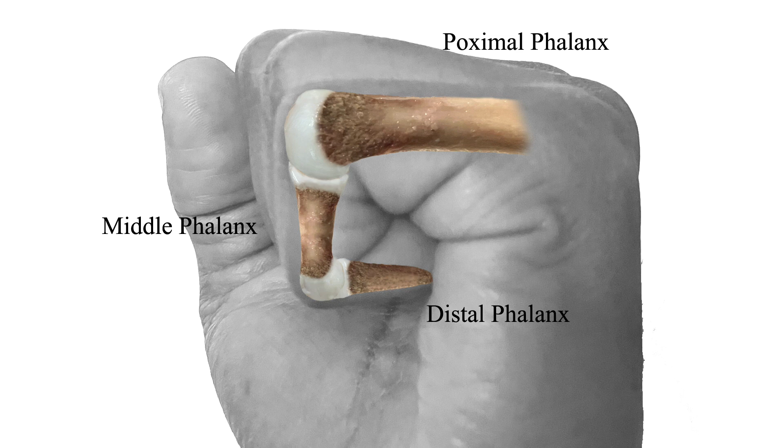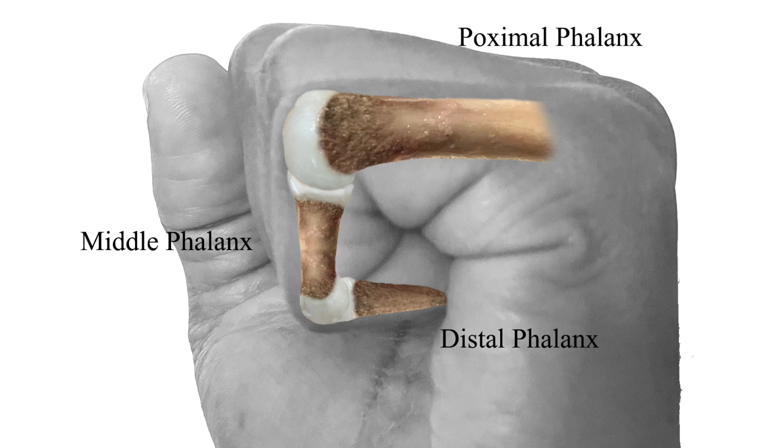The little finger has three bones: a distal, a middle, and a proximal. These bones are attached to each other by joints made of cartilage and ligaments. The bones move when muscles pull on them through several cord-like tendons, which means the prosthetic finger will need something to act as the bone, something to act as the joint, and something to act as the tendons.

Bone is a heavy material with a matrix of mostly calcium salts, phosphorus salts, and collagen. In material science, this is called a composite material. So an ideal bone substitute would be a similar composite like fiberglass or carbon fiber. But with trash, the best option is to layer plastic and metal sheets together.

It turns out that plastic trash also makes a good joint material, so it will be used for both. Fishing line will be used for the tendons, and it is not a common trash, but it is cheap, so close enough.

The measurements will use the metric scale because large fractions are a pain to deal with. For my model, I will be using my little finger in the fist position.

While approximating the centers of the joints, I can measure a 40mm line from the proximal phalanx. Similarly, I can measure about 20mm from the middle and distal phalanx. I can estimate the joint of the distal and middle phalanx to be a 10mm diameter circle, the middle and proximal joint to be a 15mm circle, and the knuckle to be a 20mm circle.

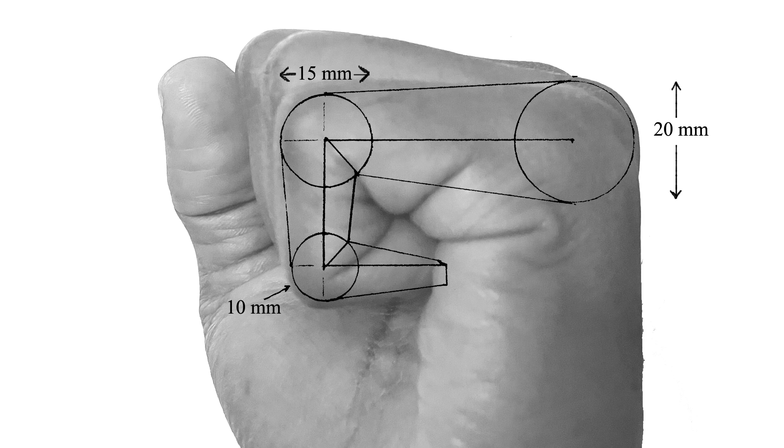I could draw lines from each joint circle to approximate the finger height. As I mentioned earlier, the joints and tendons will be plastic, allowing them to slide over each other, while the layering of metal and plastic will simulate the rigidity of bone.

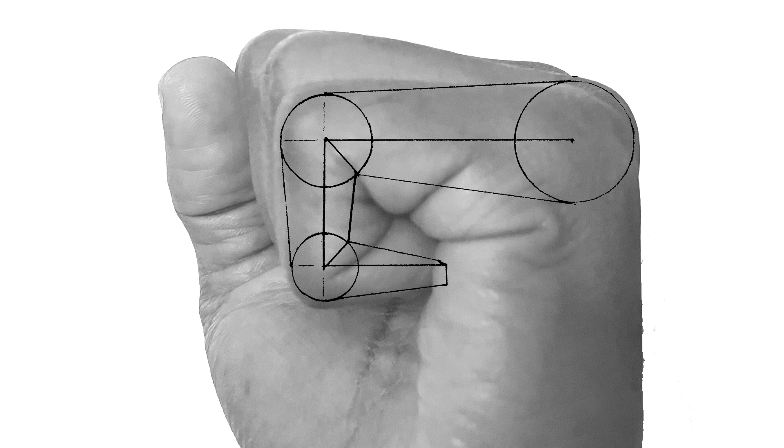Running fishing line around the metal edges will cut the lines, so plastic must also be used to protect the fishing line from the metal edges. Moreover, the tendons have to attach to bone, which means the fishing line will have to come in contact with metal at some point. This can be achieved by tying a fishing line to the distal phalanx.

That line can be run along the inside of the middle phalanx, around the middle and proximal joint, and finally outside of the proximal phalanx. Similarly, a second fishing line can be tied to the knot of the first fishing line, run on the opposite side of the middle phalanx, run around the middle and proximal joint, and then run outside of the proximal phalanx.

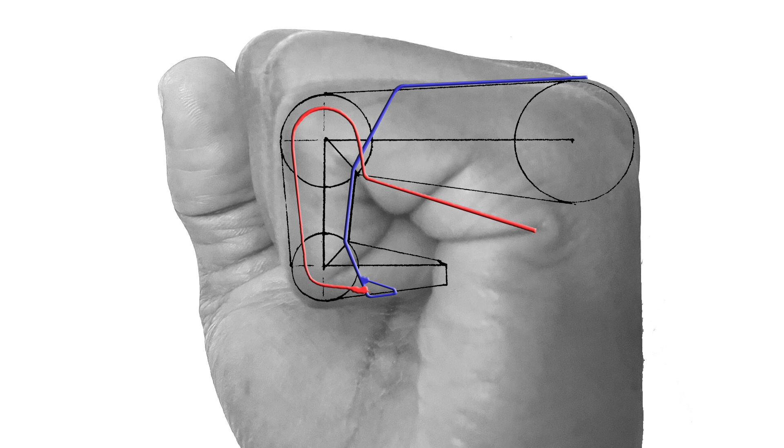This means the middle phalanx will need two plastic channels for the tendons to run through. That can be achieved by creating a core for the middle phalanx that combines the function of the joints and the channels. Basically, the two channels will be subtracted from the height of the middle phalanx, giving you a connected 5mm diameter and 10mm diameter joint in a shape similar to a middle phalanx bone, which is actually a good place to start off with in the construction phase.

The construction will require sheet metal, a sheet of plastic, some cardboard, a piece of 16 gauge metal wire, some fishing line, rubber cement, and some tools.

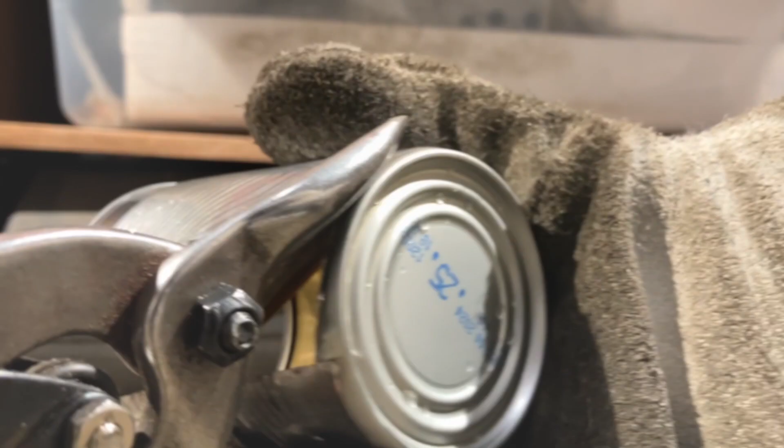A metal can or canister can be flattened for sheet metal. A canister might be under pressure and should be punctured with a punch or similar tool to avoid igniting any combustible gases. A frozen dinner will provide you with both a plastic container for the plastic sheet and the cardboard to make the part templates.

The recyclable plastic number 5, polypropylene, can give you a low friction surface that can still be glued together.

Use the cardboard to make the core template by drawing the 5mm and 10mm joint circles 20mm apart at their centers with the two radially attached sides.

Then use the cutout template to cut about 6 layers of the plastic container to make the core. The 6 layers should be about 3mm thick when stacked on each other.

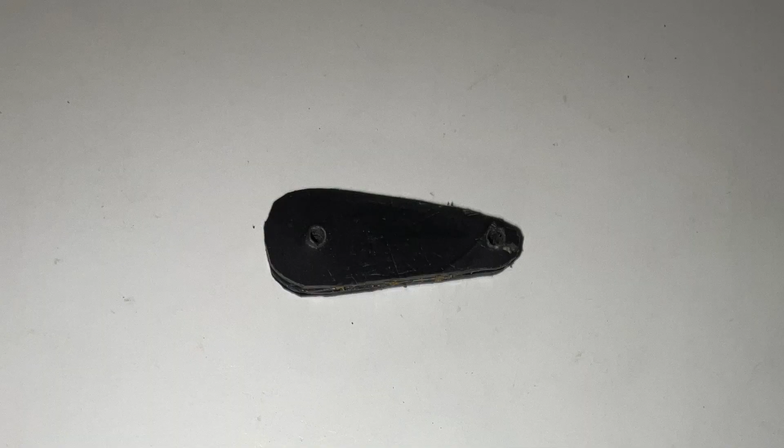Glue them together at their edges to avoid interfering with your drill bit. Drill a 2mm hole, that's about 5/64 of an inch, in the center of each of the joint circles.

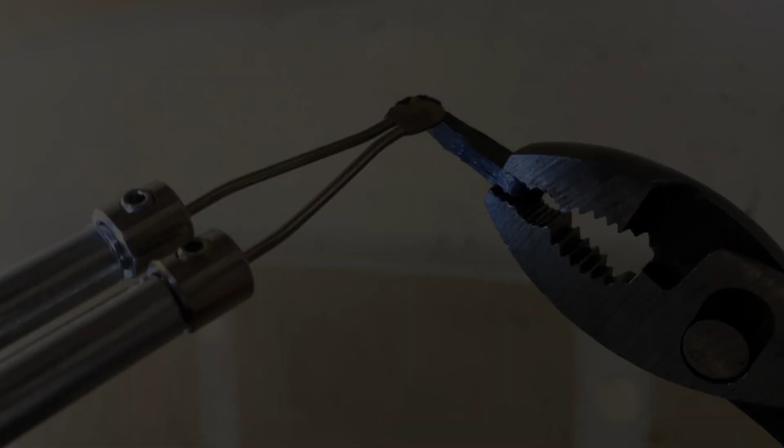If you have a soldering iron with a plastic welding tip, you can use it to smooth out the edges of the 6-layered core. You basically want to keep the layers from splitting apart from the force of the fishing line rubbing against it. The next template will be for the metal layer of the middle phalanx.

Draw a 10mm and 15mm diameter circle with their centers 20mm apart. Make a mark 14mm from the center of the 10mm circle and cross it with a mark 26mm from the center of the 15mm circle. Make this the center of a 10mm circle.

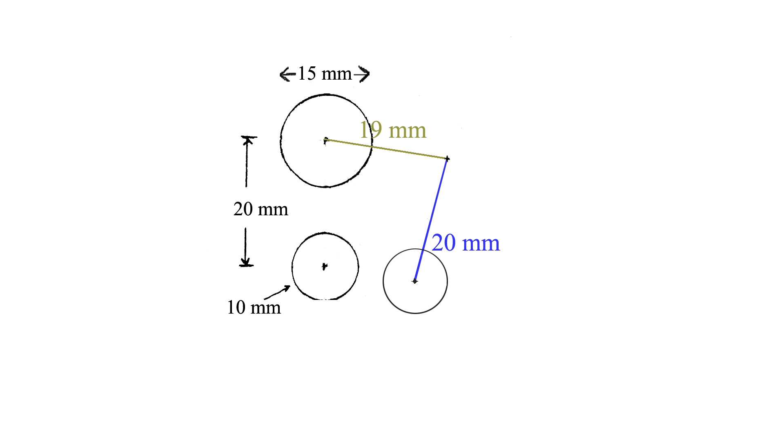Then make a mark 20mm from the center of the new circle and cross it with a mark 19mm from the center of the 15mm circle. This cross will be the center of a second 15mm circle. Next, connect all 4 circles by drawing a 4mm by 20mm rectangle in the middle of them.

Center the core template in between a 10mm and 15mm circle to draw an outside line from the 10mm circle to the 15mm circle. Repeat this process with the other 10mm and 15mm circle. Cut out this bone-like shape as the metal layer template for the middle phalanx.

Now cut the metal to shape using the template and drill a 2mm hole at the center of each of the circles. Clean up and round off the metal edges with a file to prevent cuts. Fold the metal along the 4mm by 20mm rectangular center, creating a 3mm gap for the core.

One more plastic layered template is needed for the middle phalanx, so draw a rectangle 5mm by 11mm. Take the metal template and align the outside of it to the rectangle. Then trace the 10mm and 15mm circles of the metal template. Do this on both sides of the rectangle. Connect the sides of the circles and cut out the plastic shape.

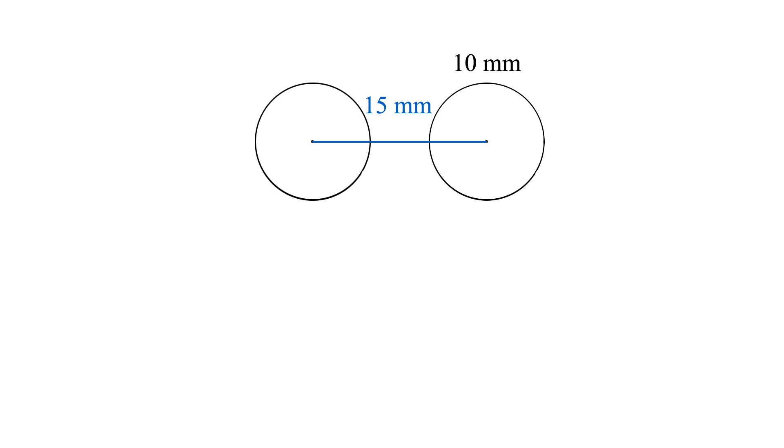Clean up the edges, drill 4 2mm holes in the center of the 2 10mm and 2 15mm circles. Fold along the 5mm by 11mm rectangular center to create a 4mm gap. The distal phalanx template is a simple design. Draw 2 10mm circles centered 15mm apart from each other.

Draw a line between the 2 centers and use it to make a 5mm by 20mm rectangle in the middle of the 2 circles. In the middle of the rectangle, make a mark centered 7mm down from the previous line and another 6mm down from that one to show the drill points. Draw a line 3mm straight out from both sides of the rectangle's base, making the base an 11mm line.

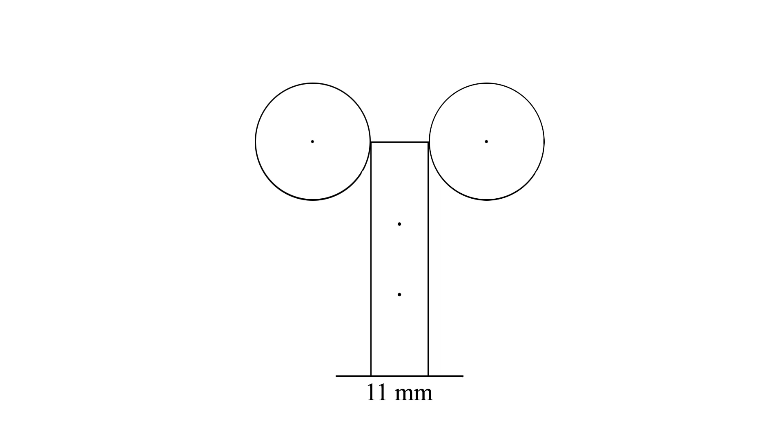Draw 2 lines connecting the ends of the 11mm base line to the outside of the circles. Cut out the metal shape and drill 2mm holes in the center of the 2 circles and 2mm holes at the 2 centered marks. Clean up and round off the metal edges with a file to prevent cuts. Bend the metal along the 20mm edges of the center rectangle to create a 5mm gap.

The proximal phalanx design will be the socket for the stump. The socket will be made of metal, so the design will need to include a sock or similar covering to allow airflow and to reduce the tissue damage to the stump. For this video, the stump will be a glove-covered distal phalanx.

The stump is measured by wrapping a 70mm by 40mm piece of cardboard around it and marking the overlap. The mark is then used to divide the cardboard into 4 equal rectangles and an overlap piece lengthwise. Draw a 15mm circle at the top of every other rectangle for the 2 joints.

Then draw a line 16mm from the top of the cardboard just under the 2 circles and across the rectangles. Next, draw a line 7.5mm from the top of the cardboard straight through the centers of the 2 circles. Finally, cut the cardboard starting at the 7.5mm line to the first circle.

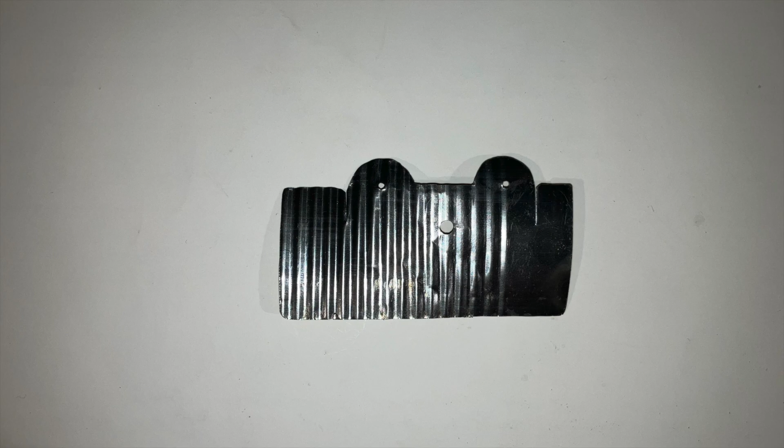Cut out the metal shape and drill 2mm holes in the centers of the 2 circles. Drill a 2mm hole 1mm below the 16mm line centered between the 2 circle-topped columns. Clean up and round off the metal edges with a file to prevent cuts.

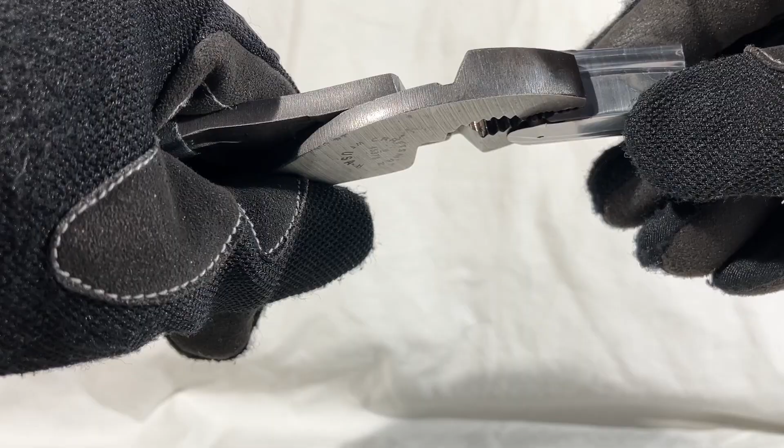Bend the overlap piece on the line started by the 7.5mm to 16mm incision. Do the same to the rectangles started by the 7.5mm to 16mm incision. Grab both bent ends to wrap the metal into a tube shape, while covering the overlap piece with the rectangular end. Tape the whole thing together. Using the 2 incisions, bend the newly formed rectangular flat surface at the 16mm line until the flap lies flat.

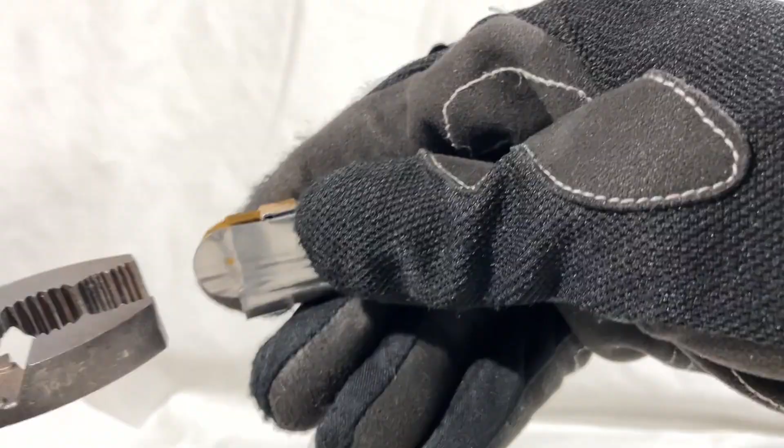Squeeze the 2 15mm circles at the 7.5mm line to form a 9mm gap. A spacer will be needed to fill the 4mm difference between the socket's 9mm gap and the 5mm width of the middle phalanx. So draw 2 15mm circles with their centers 22mm apart.

Then draw 2 parallel lines connecting the tops and bottoms of the 2 circles. Use this template to cut an oval shape in the plastic. Drill 2 2mm holes in the centers of the 2 circles and smooth all the edges. Cut out 4 15mm circles with 2mm holes in their centers and glue them to the circles of the oval. Then bend the oval to make a 5mm gap.

Cut 60mm of the 16 gauge wire and bend it at the 25mm and 45mm marks along its length. Verify that the wire fits into both of the core's 2 holes at the same time. Repeat this for the metal layer and the plastic layer of the middle phalanx before beginning the assembly. This will be the retaining wire.

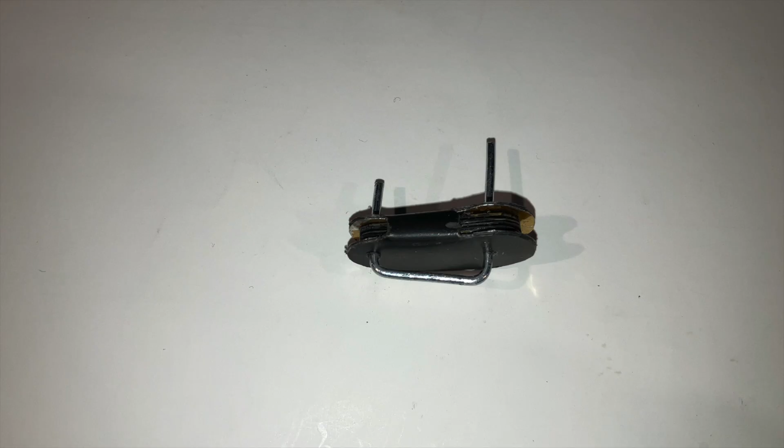To assemble the fingers, start by wrapping the metal middle phalanx layer over the core, making sure the holes are aligned and that both are facing the same direction. Next, wrap the plastic layer over the metal layer from the opposite side, making sure the holes are aligned and that the core is not visible from either side.

Then fold the spacer over the 15mm end of the 3 middle phalanx pieces and insert it into the metal socket. Take the 25mm end of the bent retaining wire and insert it into the socket's hole through the spacer, plastic layer, metal layer, and core. It should be visible from the other side before the 15mm end of the wire is even inserted.

Run some of the fishing line through the 2 holes in the fingernail part of the distal phalanx and tie it to itself to form a loop. Tie a second piece of the fishing line to the loop on the joint side and tighten the loop until it is no longer visible. Separate the two lines so that one is above and the other one is below the joint, and slide the distal phalanx over the middle phalanx.

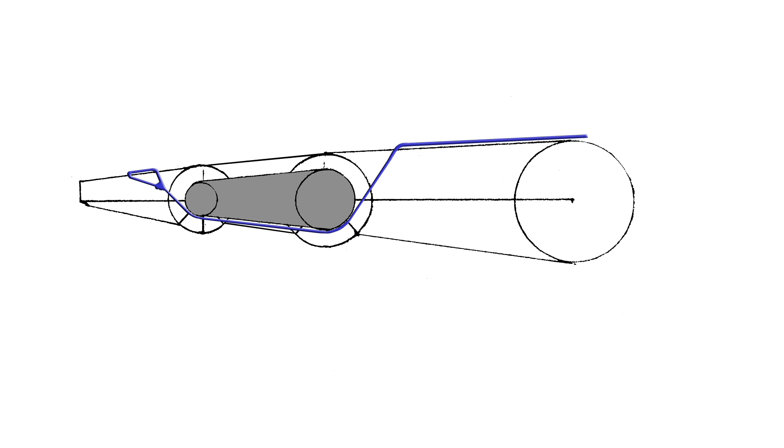Align the holes and insert the 15mm end of the retaining wire, sliding both ends of the wire completely through the layers. With the finger extended, run the lower fishing line through the bottom gap between the core and the plastic layer of the middle phalanx. Then run it in between the large end of the core and the 15mm spacer and continue through the socket's 2mm hole. Pulling on the line should make the finger curl.

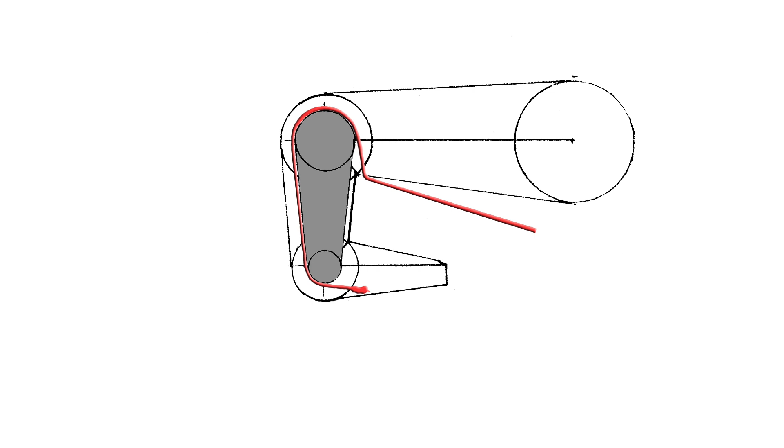Now run the upper fishing line in between the core and the middle layer of the middle phalanx. Then run it in between the large end of the core and the 15mm spacer in the opposite direction of the previous line. Pulling on this line should extend the finger.

At this point, I would like to give you some options before finishing the construction. The first option would be to use elastic to extend the finger instead of using a second fishing line. Just like the fishing line, you would tie one end of the elastic to the loop of the distal phalanx and then tighten the loop.

The 2mm hole in the center of the proximal socket should be increased to 3mm so you can tie the second end of the elastic through it. You would then need to assemble the middle phalanx around the elastic before inserting the 16-gauge retaining wire. One problem with this option is that the elastic has to be strong enough to extend the finger several times without breaking.

The second option would be to run the second fishing line through the socket's 2mm center hole and then to tie it to an extension spring. The biggest problem with this option is mounting the spring in a place that remains the same distance from the socket when the proximal phalanx stub moves.

The third option is to modify the proximal socket to limit the movement of the middle phalanx. An arch over the middle phalanx was formed after squeezing the two 15mm proximal socket joints together. This arch allows the middle phalanx to rotate past the point of full extension. To solve this, you could just bend the arch into an M shape. If you use the elastic option or mount something in the arch, this option will not be necessary.

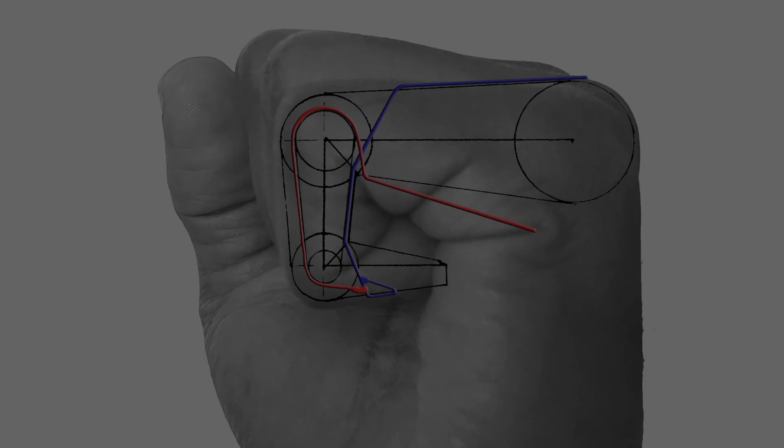The fourth option is to use the retaining wire to limit the movement of the middle phalanx. With the finger in the extended position, bend the 25mm end of the wire up towards the proximal socket's arch. Then bend about 3mm of the end of that wire so that it touches the base of the arch. Then bend the 15mm end of the retaining wire towards the 25mm end. If you are not using the fourth option to finish the construction, then just bend both of the ends of the retaining wire towards each other.

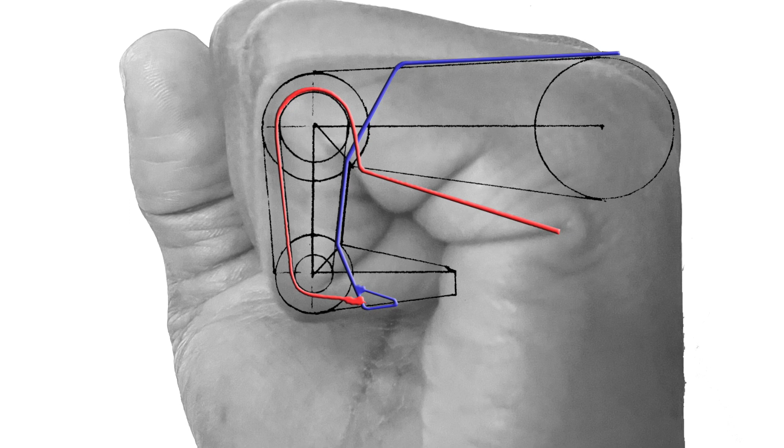Finally, to use the prosthetic finger, the fishing line should be attached behind the knuckle so that the line has to travel around the knuckle when the hand is in a fist. The second fishing line should be attached at the palm near the base of the socket.